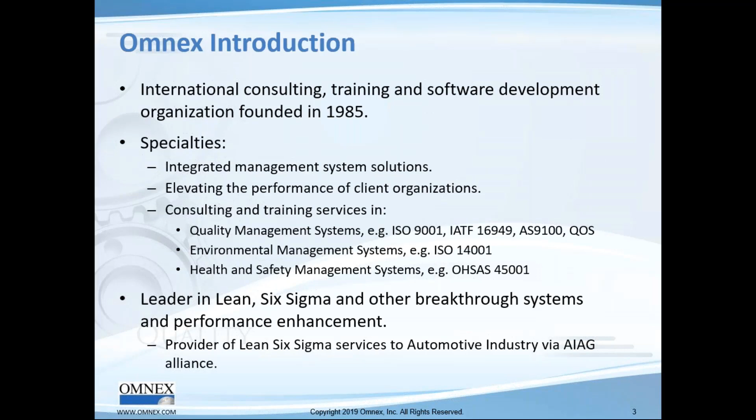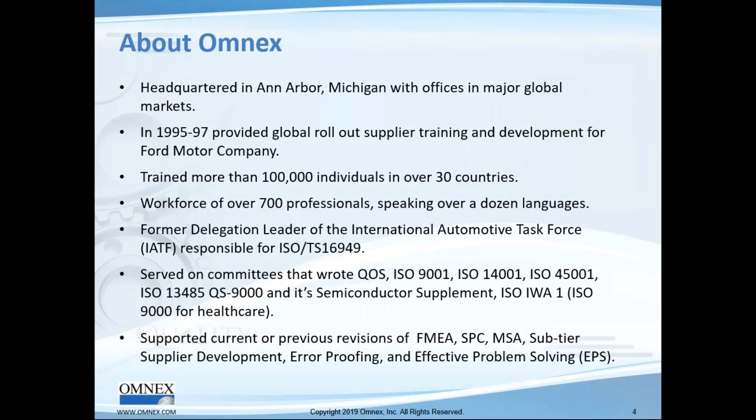All right, let's start. Folks, a couple of things I'd like to let you know about us as we go through. If you're new to who Omnex is, we're a 33-year-old company headquartered in Ann Arbor, Michigan, who has done a lot of things for about 5 different industries. Of course, being headquartered in Michigan, a lot of work in the automotive industry, and we do a lot of work currently and in aerospace, medical devices, semiconductor, high tech, and so on.

All right, we're very global, and we do the very same training. This AIAG VDA training that we have launched is being done globally in China, India, Europe, and Mexico. All right, so here is the

AIAG VDA FMEA. I just passed the abstract and what we said we'd talk about. I want to make a small correction there from Miles. I went to General Motors Institute, and a lot of us who graduated from GMI take great pride in GMI, also today known as Kettering, by the way.

And as you might expect, with my background, I've done a lot of work in FMEAs. In fact, it's one of the core items of what I started doing in the 1980s. Though I had a General Motors background, I worked with Ford Motor Company's Q101 standard, which I still love dearly, and it made a major impact in the automotive industry.

So let's talk a little bit about Greg Gruska. He's been on the writing committee of several of the core tools manuals, but something interesting is that Greg, similar to Mike Down, and I haven't talked to Mary Rousey in great detail, but I think all three of them who are writers of the FMEA standards had worked very closely with Dr. Deming. And you can see Greg still getting invited to plenary sessions when they talk about Dr. Deming, last of a dying breed.

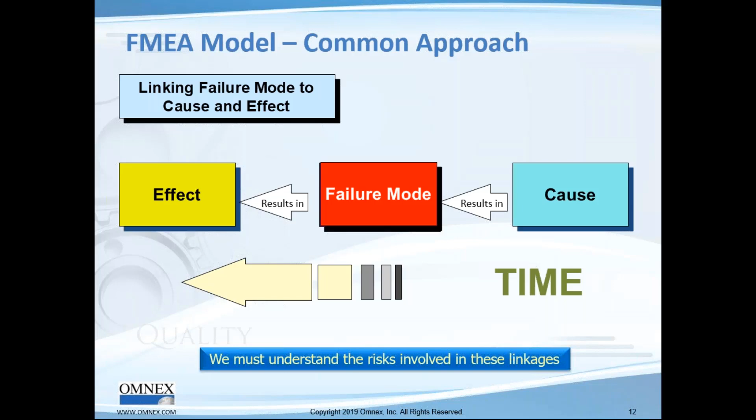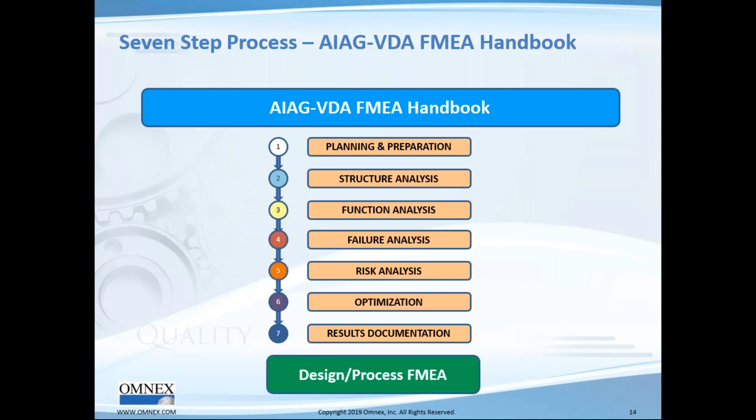All right, so today it's not about critiquing a filled-out FMEA. We're critiquing and evaluating this AIAG VDA FMEA format that's been presented to us. In fact, here are the 7 steps of the AIAG VDA, from the AIAG VDA FMEA handbook, right from planning all the way to the results. And what can we say? Well, it's the same process for both the DFMEA and the PFMEA.

Here on the very top, you see the 7 steps. Here is a form we took from the AIAG VDA FMEA itself, and it's a good summary sheet to have. You look at the very top, it says systems analysis, failure analysis and risk mitigation, and the risk communication.

The last part is one of the new requirements in the handbook. The previous processes really did not require or advocate a summary report of what was going on. It was assumed that the FMEA itself and the activities involved with it would be sufficient.

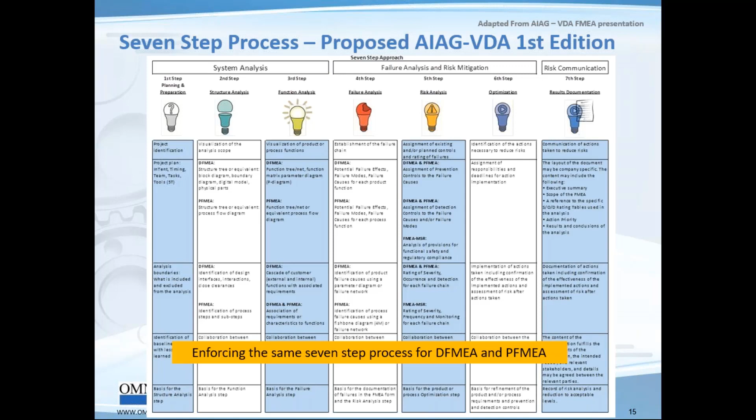I want to comment a little on the 7 steps. To me it's very similar to the 8 disciplines of 8D, in that it's not that we didn't know problem solving, but having a strict sequence of how something should be done really helps to do things right. I think the same goes here, having step 1, step 2, step 3, a bit of a recipe for doing it. As Americans we may have a little hardship, maybe think of it as a loss of creativity, but hold that thought, we'll bring it up as we delve deeper.

All right, here's the first issue. In yellow here we try to identify the issues. What can we say? Gosh darn, the form is really long.

We'll show you maybe in the next slide that the relationship is 3-dimensional between something called the focus level, the higher level, and the lower level. Look at the colors, folks. Do you see that structure analysis is 3, functional analysis is 3, and failure analysis is almost 3? Well, that's because all the way across those 3 columns, they all belong to different parts of the bill of materials, if you want to say.

One of the questions I had in the last webinar, as soon as we talked about levels, people didn't know what we meant by a level. So the focus level is typically your product. The higher level is the system your product is going to go into, which belongs to your customer. The lower level are components of your product, which you either could be making, or a supplier could be making.

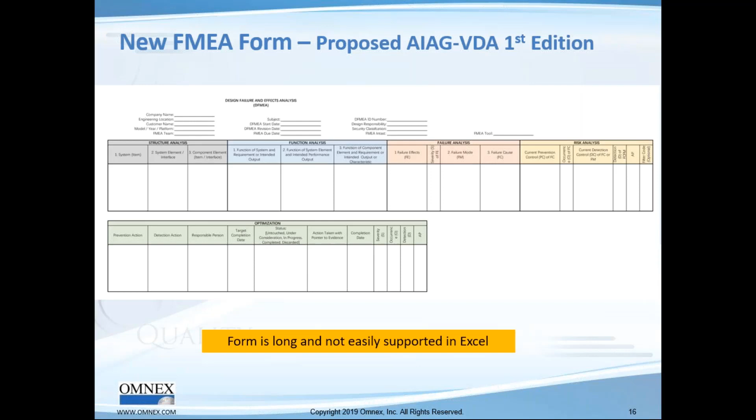So in a very simplistic way, you have a subsystem that goes into a system, that has components going into it. That's the focus level, higher level, lower level. But here, the point we wanted to make is the form is long and not easily supported in Excel. That's the first issue we wanted to talk about.

Next, what we wanted to say is just go through the first step again. One of the things you'll find in the first step is you have to do the 5 T's. You can put the 5 T's right in the header itself. Then you do the structure analysis, which is really the BOM itself, the bill of materials. It's called the structure analysis, which is what the Germans called it.

Then you identify the functions and requirements for each of the structures, or products, you're looking at - the higher level system, your subsystem, and then components at the lower level. Then you have failure analysis, and then you do a risk analysis. Then you do optimization, which is the recommended actions coming out of the action priority step in the risk analysis. So RPN is being replaced by action priority. And then, of course, you have the 7th step results documentation.

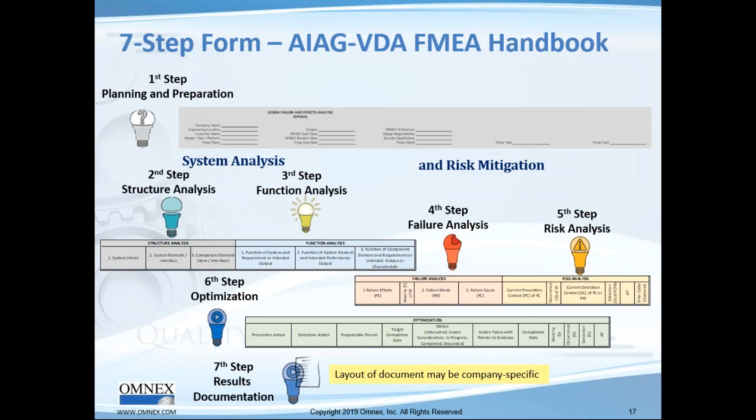Again, other than the form being very long and very specific to guide the person filling it out, we can also say having a disciplined process for an FMEA is not a bad thing. Any other comments you want to make, Greg, before I move on? No, go ahead. Okay, all right.

So the point here is we're going from a 2-dimensional to a 3-dimensional form. Here is something that could be done by Excel, but we have this 3-dimensional form because you've actually got 3 levels of the same product: the subsystem, the system it goes into, and the components that go into the subsystem. Then you can imagine all the functions and the different relationships between the higher level functions and lower level functions, which is sort of the higher level system function being met by the subsystem functions of your product, and being met by the lower level subsystem requirements.

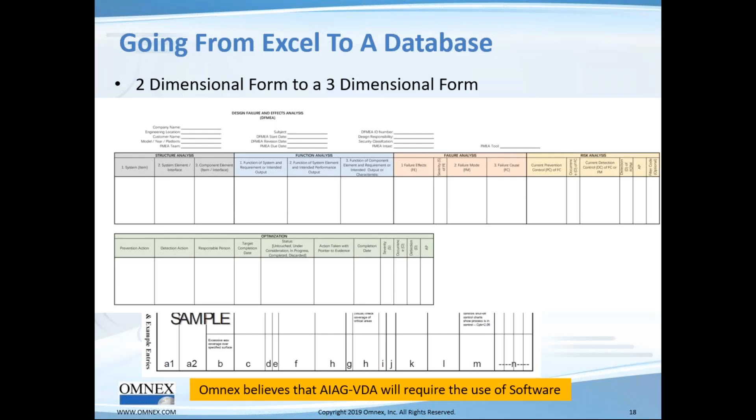So that's sort of the architecture underlying this. As soon as you get into a complicated product - if you take a simple product, we all believe Excel will work, but as soon as it gets a little more complicated, Excel is not going to quite work. Yeah, that's true. All right, so I don't want to bring it up as a problem - it could be a problem or a benefit.

What do we know? Well, as Greg was mentioning, it's not going to be a problem getting suppliers involved if you're the focus level and the subsystem. Let's say we're all tier 1s. As a tier 1, we can always get our suppliers involved, but how the heck do we get the customer involved? How many of us have ever gotten a DFMEA from the customer?

So it's a problem, and that's what we're bringing up here - the methodology requires function analysis and failure analysis of the system, subsystem, and component. Knowledge of the system and component is questionable for the cross-functional team that really knows the focus level. Does the tier 1 really know its own product? Does it really know the product of the supplier? Does it really know the product of the customer? Well, this is going to force that.

The problem will be if one of those levels is not cooperative. So what are we saying here? We're saying even in making the change with the supplier, we have an implementation class where we think the tier 1's new product development / APQP process needs to change, and needs to be cognizant about parallel development between customer, ourselves, and our suppliers. So it's not just where you interject working with a supplier in your new product development process - it's understanding there are three new product development processes going on.

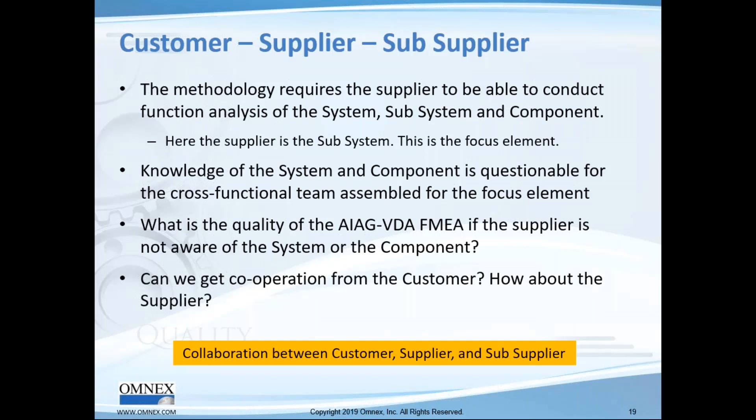I'll make one more comment - the next revision of the AIAG VDA FMEA, I hope they talk a little bit more about where the industry is going with hardware and software. I haven't myself delved deep enough into the MSR to see, but I think it just needs to be there in the structure analysis. We need to go as far as hardware and software. And of course, folks, that's what we're going to be telling you as we work with you in these mechatronic systems.

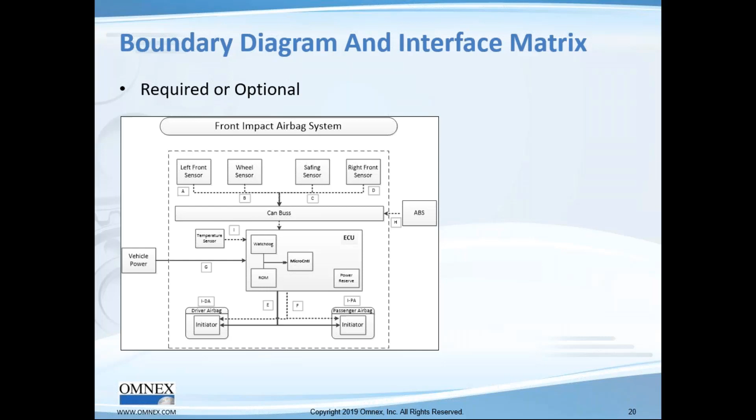The next problem and issue we want to bring up is that the handbook says you can either do the block diagram or the structure analysis in the DFMEA. What we'll tell you is you have to do structure analysis, or you lose the focus level, higher level, lower level concept in the DFMEA - which means you also have to do a boundary diagram, and then we have the P diagram, and the interface diagram.

Greg, why does the interface diagram become really important when we do AIAG VDA FMEA? Well, if you're only using the structure tree, you don't clearly identify the interfaces between the different elements within the product itself. When you're looking at systems in FMEA, one of the major differences between a system FMEA and a design FMEA is that a system FMEA recognizes, identifies and discusses interfaces, whereas a design FMEA looks internally - it doesn't look externally.

Consequently, if you're not displaying it, if you're not clearly identifying it, the chances are you're going to miss things that could affect you adversely. Folks, when we look at the current DFMEAs, the 4th edition DFMEAs, our customers didn't really do a good enough job focusing on the interactions between the components and coming up with the interface functions.

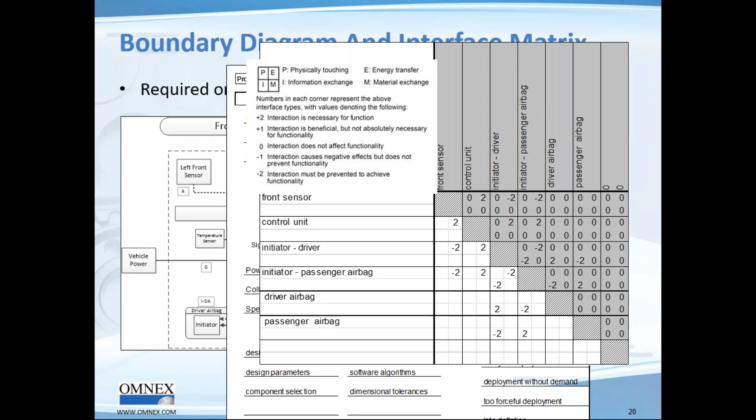As it turns out, the practitioners of the FMEA process say, well, you can always add it, and that is true, it is valid. The problem is which interface or what interfaces do you have to add or identify, and which ones do you not. For example, control unit to the front sensor, from a physical touching standpoint, you don't have to have any concern on it. Zero, right?

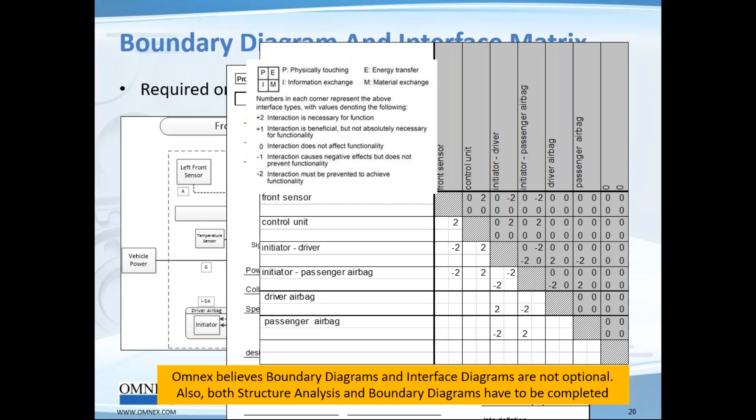Folks, we really believe in the P diagram also, but we're just going to call it optional. So in the model that we are proposing, you have to do boundary diagrams and structure analysis - you can't choose between the two, it's not optional. And we do believe interface diagrams are also highly recommended from Omnex, so much so we put it in as a requirement.

All right, so why only 3 levels? Greg, do you want to take over the presentation from here? All right, and we'll discuss the issues at hand.

The FMEA process as given by AIAG VDA requires at least 3 levels: the higher level, the focus level, the lower level. The problem is, in this case, we have 4 levels: car, safety, airbag, ECU. If we only looked at the 3 - safety, airbag, and ECU as the upper, lower, and focus level, with airbag as focus - we may not look at or identify what are the risks of a problem in the vehicle itself.

Greg, I'll just say this: for many of our customers today, because of where the industry is going, there are more levels below the ECU. In fact, I was working with a customer this week - they went from the system right to the hardware, and put all the components underneath the hardware. So the ECU will have lots of components, or maybe it's a circuit board, and that'll have lots of components. And somewhere in there we need to actually put software also. But go ahead and continue.

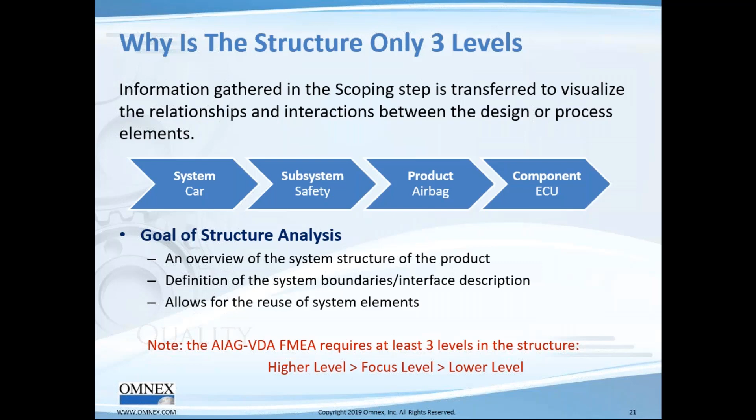We have 2 examples in the next 2 slides and we can discuss it a little more. But I'll just say this - why are we bringing this up? We're saying real life has 5 or 6 or 7 different levels from womb to tomb. And in all the examples, because we have a strong FMEA team in Germany who's been doing these VDA FMEAs for a long, long time, we only see 3 levels. Rarely do we see somebody going down to a lower level than a lower level. That's the point we're trying to make.

And what happens if you focus on only 3 levels, Greg? Well, the FMEA team will jump multiple levels to what they think is the real cause, rather than just focus on those particular 3 levels. That's in the current approach. With the new FMEA, all the failures must be at the 1 level down. Now, we can say that one of the positive points is that we identify a flow down, which makes it easier to see the requirements flow down.

But when we don't allow the jumping, or when we don't have the jump, it does have some negative points. One is that you need additional documentation and additional analysis. And if we have the DFMEA where we're only restricting ourselves to one level, are we really controlling the right root cause? That's the point. So if you go step by step, you're going to have lots of documentation.

Number two, we would say, hey, when I was doing the AIAG 4th edition, I was going right to the root cause. Maybe it's way down, to the component level, three levels down. I'll just go identify that failure as causing it. And that's the rub here. I can't say one is better than the other, but you do lose something in between the two.

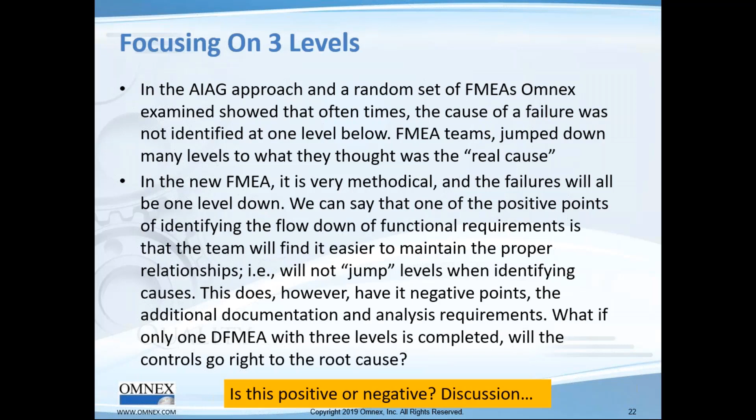All right, let's look at the other side of it. So this is a lower level issue. What about the higher level issue? Again, that gets to, if I'm looking at the safety systems to the airbag, I really do not look at what is happening in the vehicle itself.

Now, from the matrix form that's in the handbook, they recognize that, and they include it in one of the columns. At the higher level, they put and/or the user. However, it doesn't say how do you do that if you're not using that Excel-based form. In there, how do you even get that final user when you're only looking at three levels on it?

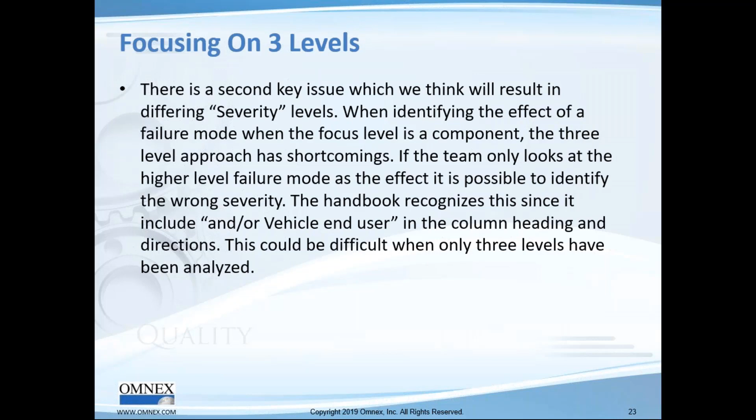Okay, so folks, that's the idea and thought behind why only three levels. If you don't only do three levels, which is meaning you just do it at a subsystem level, what do you lose? All right, the next issue is a more serious issue, and I'll take a first stab at it and let you go at it, Greg.

When you look at all the different examples in the AIAG VDA FMEA handbook, and you look at all the examples, we know how our VDA partners in Germany work. Greg and I frequently interact with who is considered one of the topmost FMEA specialists in Germany, and we've had this dialogue maybe starting with 2013 when we did a couple of symposiums with him.

The AIAG VDA looks at the failure cause always at the lower level. That's the way it works. And what we want to say is, look, folks, when the Americans did design FMEA, we tried to improve our current design. So a lot of causes are at the current design. I'll let you take over, Greg.

All right, and again, with the core tools FMEA, one of the things that was spelled out is that when you're looking at cause, what in the design process could cause a missed design or misdiagnosis of the design of the product we want. So some of the possibilities is that we did not understand the use case. We didn't include all the expected stresses that the product was going to be exposed to. We didn't communicate that to our suppliers at the lower level.

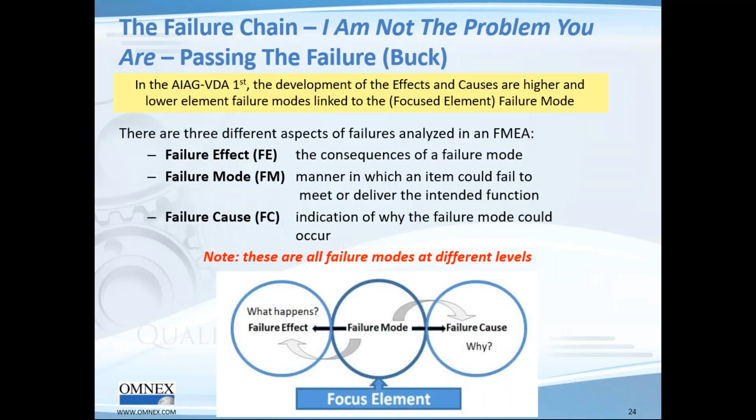Having worked with this, it's sort of a designer mentality, and especially, I don't want to say a German mentality, but it says, hey, my design, it's perfect. Yours, I don't know, but mine is perfect. Let's not even look at mine because I'm perfect. Anyway, that's my joke, all right.

So, failure analysis. I knew everyone would blame me, pass the buck downstream. Okay, we already talked about it a little bit. That's what we think is happening with this model, and it will bring it up as a problem, and we'll come up with a solution. Anything you want to say here? No, before going, all right.

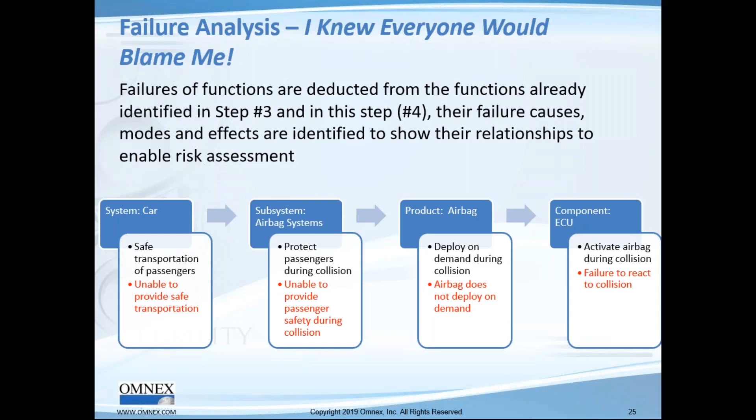So this is the solution we propose: the model needs to be changed where the first thing we think a design team needs to do is look at the causes at the focus level, then let's look at the cause at the lower level. Doing this exercise, folks, it doesn't happen like that. We come up with both lower level causes and current level causes, but the model needs to understand it. And of course, the software that you end up using has to follow that. So we offer this up for anybody to use. We just ask for a citation if you do use the model that we're proposing.

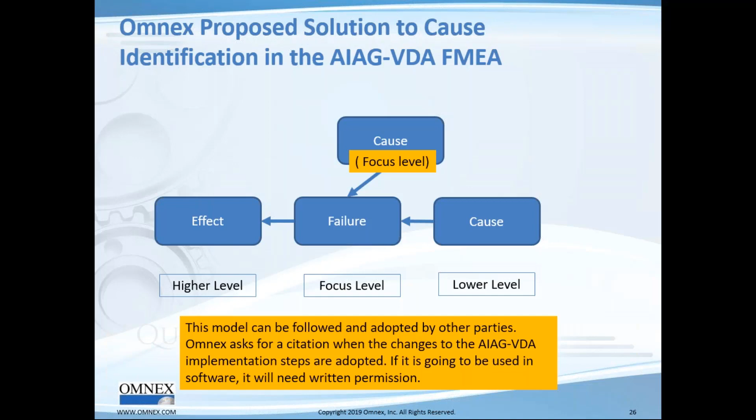And you can see the writing on it because we also have software. We just want to make sure that if any other software user or software company is going to do it, we'd like to give them written permission to use it. Okay, this is also another big issue, a key industry issue that the 7 steps does not address that we want to make sure they address.

Go ahead, Greg, and I'll make some comments at the end. The DFMEA—well, let me step backwards. I can't even remember, but 16949 says you have to identify special characteristics during the design activities, which are then communicated to the processing people who then augment and finalize it. And nobody's doing it. Nobody's getting it from the design folks where it should come from, and it should be based on rules.

But go ahead. Well, as it turns out, DFMEAs deal with functions, not characteristics. So the approach—and we've got to give Ford Motor Company credit for it—was to identify special functions. A special function is the function equivalent of a special characteristic. The key thing is that once the design in a DFMEA identifies special functions, there needs to be at least one or more characteristics related to that functionality that then become special characteristics. Greg, I thought I came up with this. You're telling me Ford did? Yeah, Ford did, right.

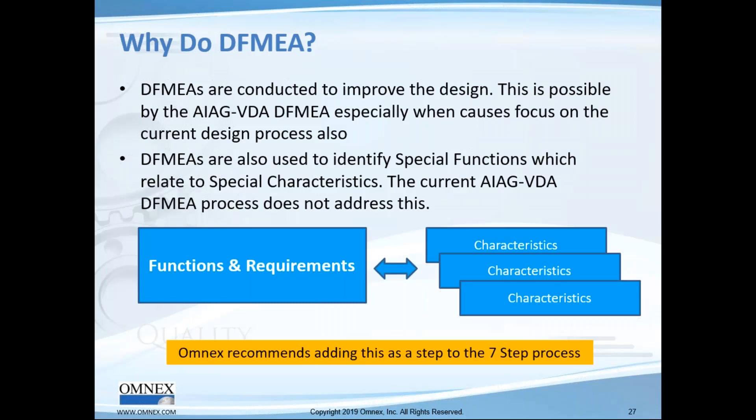Well, they have the YC, YS or whatever on the DFMEA. The thing is, the handbook does have a couple of sentences, but it seems like more of an afterthought, because in the DFMEA there is no column called special functions or special characteristics. What they have is an extraneous comment column for filtering, and they put a note at the end of the book that if you're going to do it, you can use that column. But it's not part of the process, no place. We think it's got to be part of the discipline of doing a DFMEA. We've got to call it out—there are rules behind what is a special function, and then the team has to go and identify the special characteristics. We'll show you where, a little bit later.

Okay. All right. The next is a very key idea, and this is where I want to make the point: I think the AIAG-VDA FMEA is great. It's a move in the right direction, really because of e-cars and autonomous cars. So what do you need to do? It requires you to come up with cascading requirements between system, subsystem, and components. Unfortunately, it's a cascading set of functions the way it's practiced today in the VDA community.

The handbook says you could have functions and requirements—there's a section on functions and requirements—and Omnex will say it's not optional. You have to mandatorily do functions and requirements. Why? Because ASPICE requires it, 26262 requires it, the cybersecurity standards require it, and SOTIF requires the engineering V.

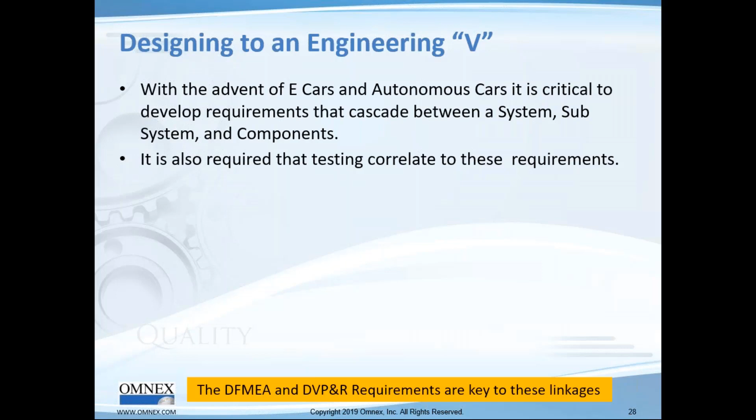Let me just show you the engineering V so you understand it. If you want to get this flow down of requirements from the stakeholder—that's the higher level—to the system, which is a lower focus level, to the subsystem, which is a lower level, and then down into hardware and then software in a second-level DFMEA, you've got to do functions and requirements.

What else is missing? What else is missing is this whole idea of test plans on the right-hand side. So folks, I don't know if we came up with the idea of the linkages between process flow, PFMEA, control plan, and work instructions in the mid-80s. Somewhere in there we came up with this picture. I don't know how far back it goes, maybe when Dave Watkins joined us. I forget now, Dave, when you joined us.

Dave Watkins and Mary Rousey are in the room next door. And we have this wonderful picture that shows the design on one side and the process FMEA on the other, shows the control plan and PFMEA linkage, and shows the DFMEA and DVP&R linkage. So it's something we've practiced for a very, very long time. It's a miss when it's not done.

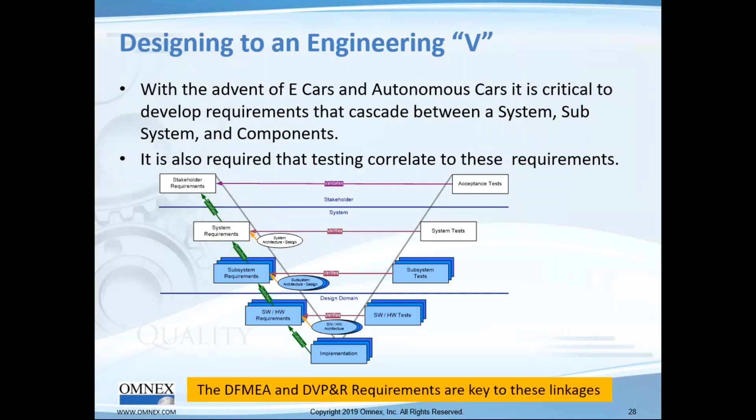This is a great opportunity to link the DFMEA and the DVP&R. The industry needs it, and it's a problem. The handbook does not even address DVP&R and does not address control plans. So if you're coming up with a 7-step discipline, folks, it's missing.

So what do we need to do? What is the solution? We think two changes need to be made to the AIAG VDA 7-step process. During function analysis, we need to put down functions and requirements, because then they'll automatically link down and up. And as a final step of the 7th step, you need to connect the preventive and detective controls to the test plan or DVP&R if you want this to really be required.

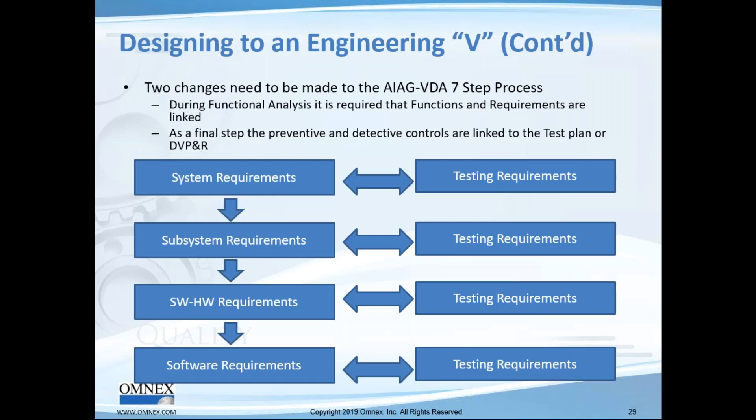Folks, someday, someplace, I'll tell you all the issues. If you don't have it, it's a real issue. So this is the last slide for the DFMEA, and then we'll pick up the PFMEA. These are the steps we think are required. Of course, the 5 T's are already there.

In structure analysis, you need to do really two things: structure development, which includes boundary and block diagram, and interface diagram. That's what we covered earlier in the slide. Third, you have to have functions and requirements in step 3.

Step 4: causes should be on the focus level before causes on the lower level. Again, in the creative process of how our brains think, it'll come up mixed, but don't forget, it's easiest for us to improve our current design before we tell somebody else to improve their design.

Okay, and then we have 5B. As soon as you finish risk analysis, you need to link the special characteristics and pass it on to the process flow, PFMEA, control plan.

But the nice thing is the handbook does say when you do the PFMEA, link back into the design. It makes you look at the failure mode and identifies the functional design failure. But folks, it needs to come this way first. Don't leave it up to the manufacturing folks to tell you what in the manufacturing fails a design. We need to be thinking proactively and populating this.

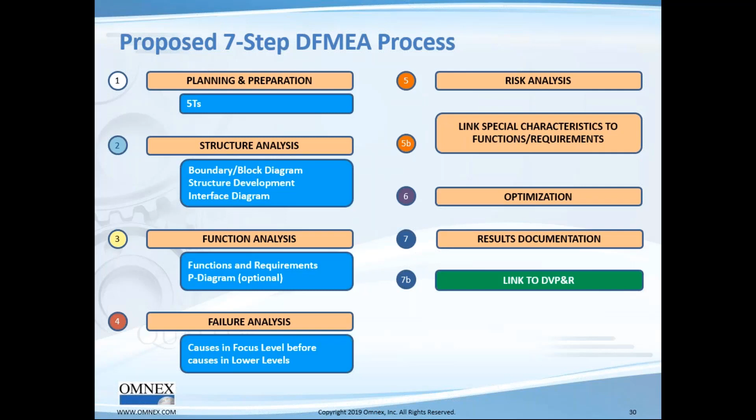And then we have the final 7B step linking to the DVP&R. This is what we'll propose as a 7-step DFMEA process that we will allow anybody to use. Just put down where you got it from and so on.

All right, next we'll talk about the AIAG VDA FMEA, process FMEA, and let's start with the manufacturing process flow example. This causes Omnex a lot of heartburn.

This actually came from the DCP, and of course we've embellished it further. What a beautiful process flow example that we think is best in class. Operation number, description, and it goes womb to tomb, all the way from receiving to shipping.

In fact, I think there are CSRs that say you need to have inspection and rework, and it also says you need to -- these are all hard-won battles we've gone through in getting things. Why do you need this kind of flow diagram? Why don't we just show one operation 20? Because the PPAP says you've got to look at every path through the process.

The streams of variation, right? Yeah, streams of variation. And a pictorial tells you also the manpower used, so you can better come up with the failure causes -- the 4M. And then you see the product and process characteristics, and this is the link between process flow, PFMEA, and the control plan all together. You can see here process characteristics and so on.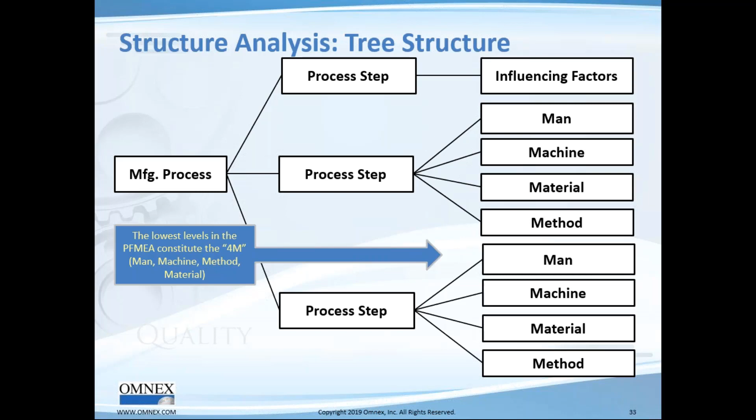And this is what is being proposed as the 3 levels. On the left-hand side is a line, manufacturing department, whatever—actually it's the product name, the product that you're producing. It's a manufacturing process line, which has these process steps, and which has got the 4 influencing factors, the 4M.

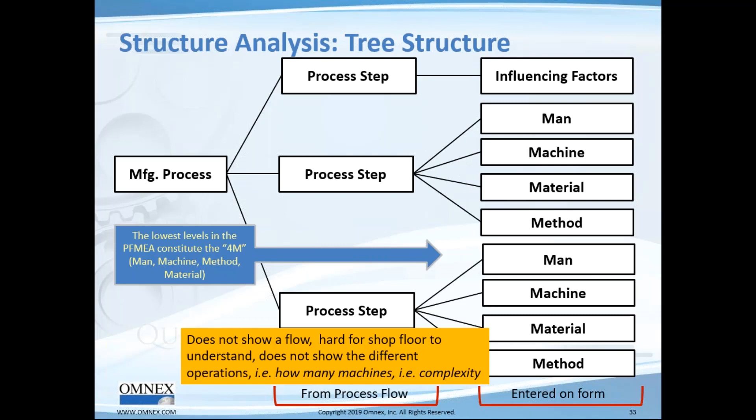One of our other writers of the FMEA gets really upset, and he says it doesn't show a flow, making it hard for the shop floor to understand. He thinks the shop floor will just not get it, since it does not show the different operations, how many machines, i.e. complexity. I thought I would capture his words here in yellow.

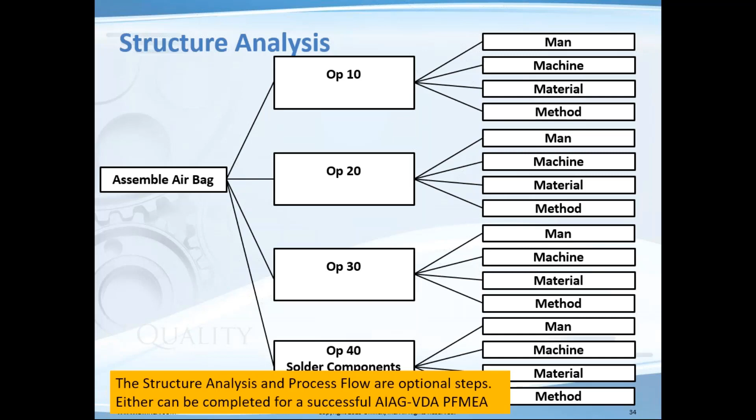So the structure analysis and process flow are shown as optional steps. Here, you can actually skip the structure analysis and just do the process flow. In the DFMEA, you can't get away with it because you need the structure analysis. But here, the structure analysis doesn't really matter as much. In fact, I went as far as saying they were just trying to be pedantic, if that's the right word, between the 7-step DFMEA and the 7-step PFMEA.

Folks, maybe at a later time I will come back and say maybe it's a good idea to have the same 7 steps, but the only people who will be doing both, I think, are consultants. Inside the company, the people who do DFMEAs and the people who do PFMEAs are different people. Do we need to have the exact 7 steps? I like the idea of consistency, but not if it's forcing a false idea.

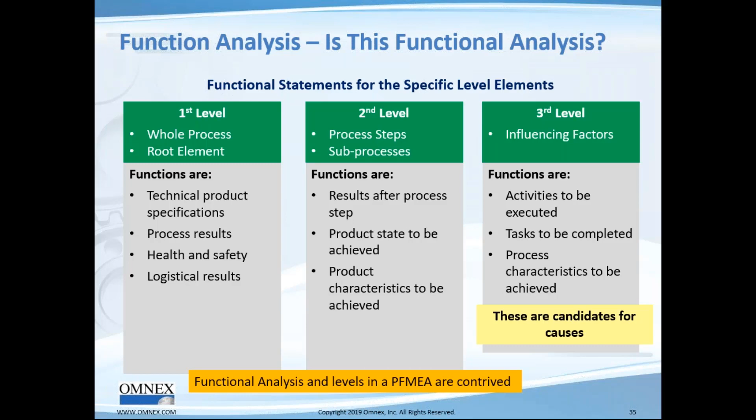Anything else you want to add? Okay, let's go on then. This is what Greg and I came up with in one of the papers we wrote, a suggested process flow that bridges the gap. You want to comment on this, Greg?

Yeah, one of the problems with the work elements and the functions of the work elements is that when you're doing it in the structure tree, the work elements really depend upon the requirements—or the characteristic—that you're producing. So different characteristics will have different work elements that affect it or not. So the approach we're recommending is that you do the process flow where you have the requirements, and then you put in the work elements and the functions of those work elements.

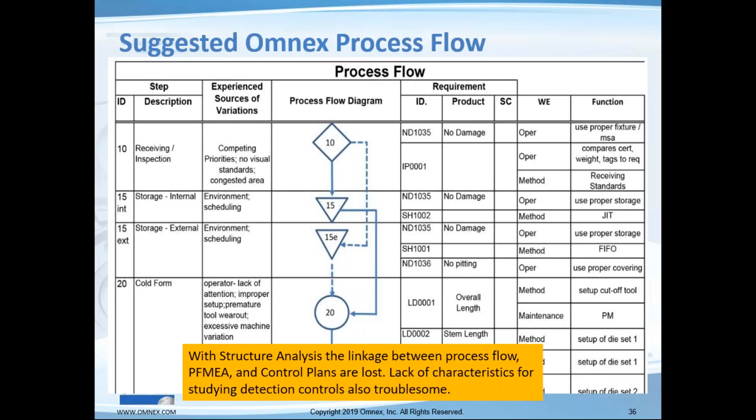So this is again the comment: with the structure analysis, the linkage between process flow, PFMEA, and control plans is lost. Lack of characteristics of studying detection controls are also troublesome. All right, again, we leave this to the public.

Our goal is to propagate right thinking, and we just want a little credit because we have gotten so little credit for all the work we have done thus far. You know, I'm getting quite old, and we're all getting quite old. We'd like at least some acknowledgement for all the heavy lifting we have done over the years.

Also, there's a link to that—do you see the standardization, the FMEA-driven plant floor controls? This goes back to the 1980s for us, by the way. And that linkage is missing. So, very important, in the end of the day, the PFMEA.

So one of my friends at an OEM—I was Mr. Laser Specialist for a long time for General Motors, and I brought laser welding into GM—so I have many friends still in the industry at that kind of level who are actually doing all the heavy lifting. And the disappointment for many folks is that they do it routinely, and then it goes into their desk. Nobody sees it. Folks, there's no value to a PFMEA that doesn't link to a control plan, that doesn't drive shop floor actions. That's got to be the end goal of what we all do.

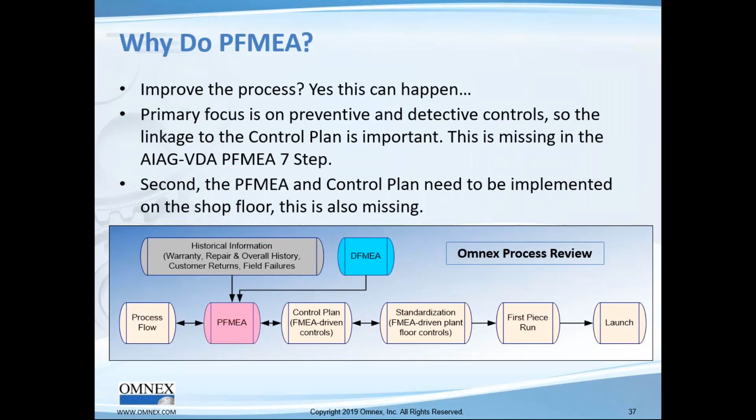All right, what did we also want to say here? Let's go on. I will say one thing—this actually came from our Dave Watkins.

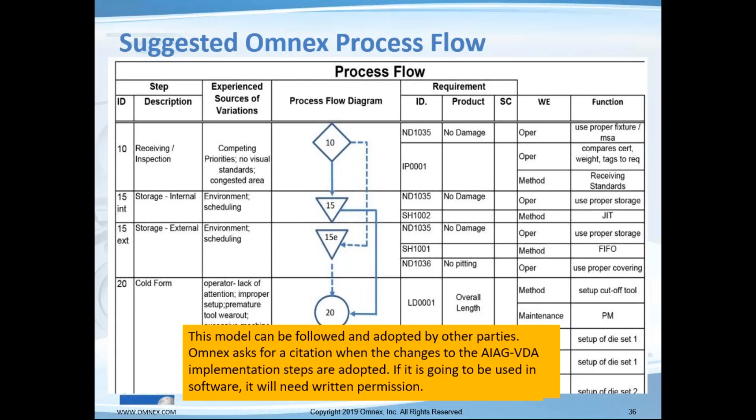He liked the idea of the AIAG VDA FMEA and structure analysis, but it clearly linked the specific functions, or requirements, that affect a failure mode. He thought people are a little vague today, and this would really help clearly identify it. Maybe we should also put a link there when we say setup - click and you can see the setup instructions, PM instructions. Yeah, you can do that.

So this is sort of the last couple of slides as we summarize. Discussion on the methodology going to the PFMEA - when you read the AIAG VDA manual on the PFMEA side, it seems that you only select portions of the PFMEA, and folks, we are against that.

It's hard-won battles. People always try to take shortcuts. This is where we always said the Germans took the lead in design FMEAs, and the Americans always took the lead for process FMEAs. Let's not lose and get behind. Let's make sure we do a womb to tomb, shipping all the way, receiving all the way to shipping, and all the different rework and inspection stations, because that's all the places where we're getting problems.

And that's why U.S. industry is at almost 0 ppm. Let's not lose that - that's the scoping question. We don't think there should be an idea of scoping. Let's do all operations, number one. Number two, structure analysis using the process flow. That's what we think - function analysis using that process flow diagram in that modified structure we talked about.

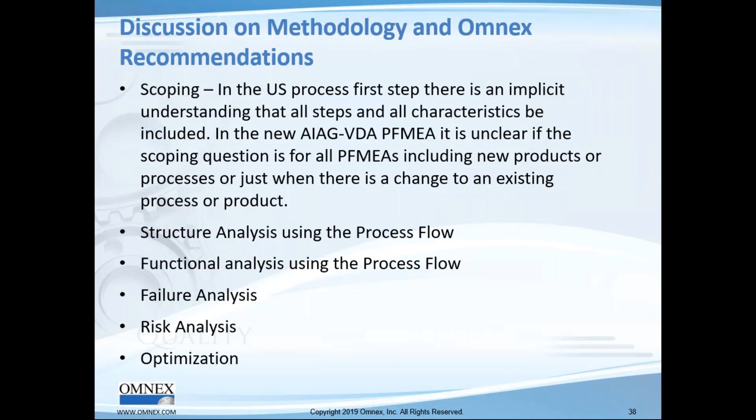Failure analysis, risk analysis, optimization - this is the 7 steps we recommend: the process flow diagram and structure analysis, the function analysis as characteristics for the focus level. We don't think you should even populate that function level, but really if you do the process flow correctly with that modified structure, then of course you can, because we've already identified the potential failure causes that drive that characteristic. And then failure analysis, folks.

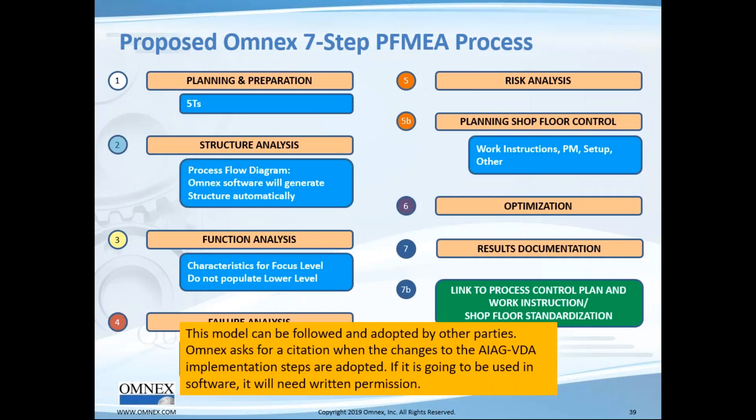I'm going to summarize things, and then we'll go into Q&A, right on time. AIAG VDA is a new 7-step process that will appeal to companies who supply European and US automakers. If you are supplying both US and European automakers, it should be a no-brainer - for those who have safety products and are looking for a method to enforce an engineering V. I'll also say ASPICE also requires the engineering V.

We don't know this yet, but SOTIF and cybersecurity standards coming will also require engineering V. Organizations looking to make a culture change internally with the product shift to electric and autonomous cars need to take a serious look at this modified 7-step with the linkage between functions and requirements and DVP&R.

Second bullet point: the real ROI is no longer PPMs. The PPM, cost of quality savings, we already have gotten. The return on investment, folks, is in reuse - what the handbook calls baselines, and we're very happy that what we call in Omnex design and process families, product and process families, are being really touted, and we believe in it. This is the way to reduce by 80% or more when you do a new design, to reduce the costs.